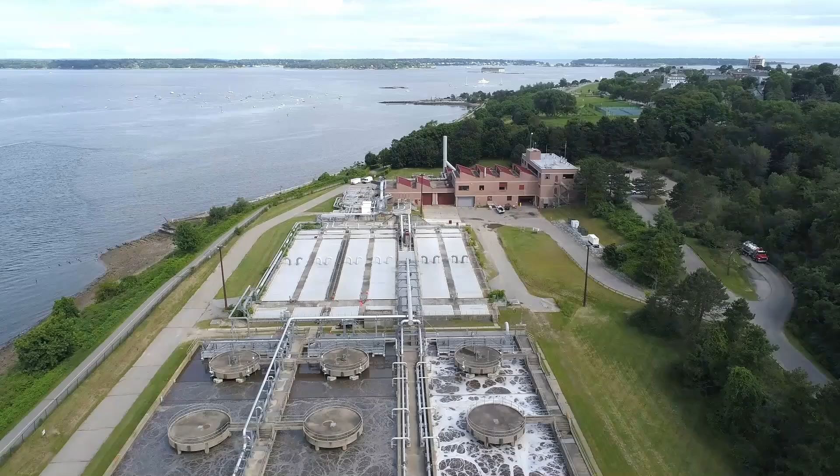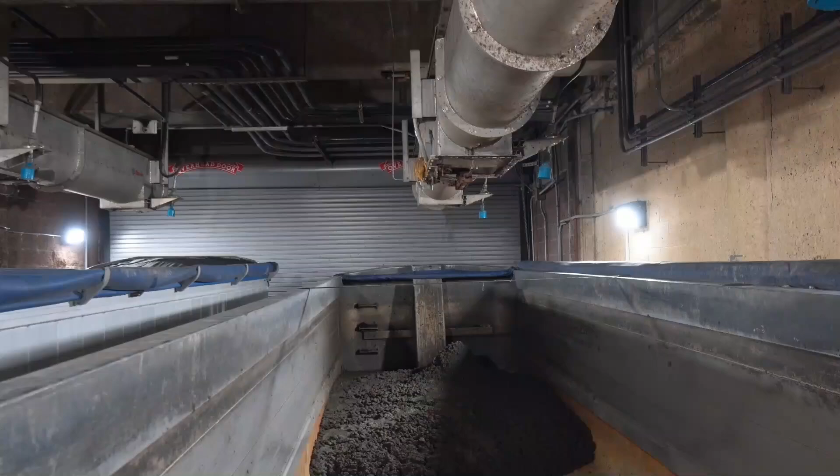The Portland Water District operates 5 wastewater treatment facilities in Greater Portland and oversees 2 of the largest industrial pre-treatment programs in the state. Over decades, millions have been invested to improve treatment to protect Casco Bay. The Westbrook-Gorham Regional Wastewater Treatment Facility was built in 1978, and the East End Wastewater Treatment Facility opened a year later in 1979. Together, these plants process over 25 million gallons of wastewater a day and prevent 8.7 million pounds of pollution from entering the environment.

Wastewater from homes and businesses is collected in a series of pipes called a collection system and is pumped to the treatment facility through pump stations. You may have seen these pump stations around Greater Portland and wondered what they do. Once wastewater arrives at the treatment facilities, cleaning begins with screens that remove debris like sticks and trash. The wastewater then flows through grit chambers that separate and remove inorganic material such as sand and stones from the wastewater.

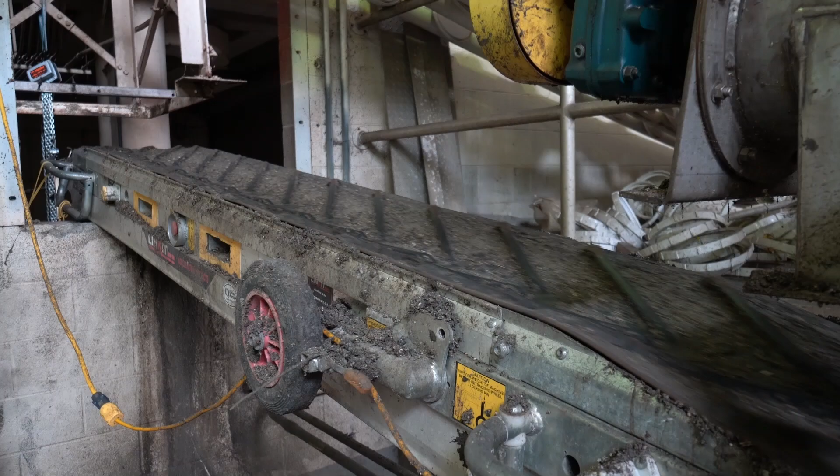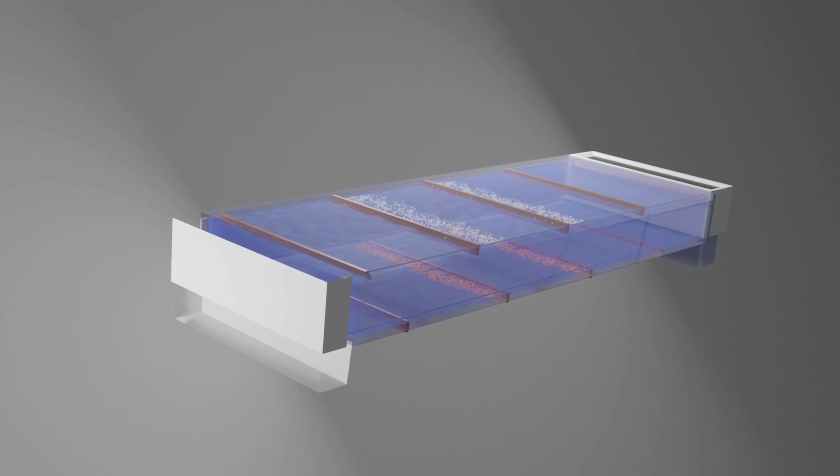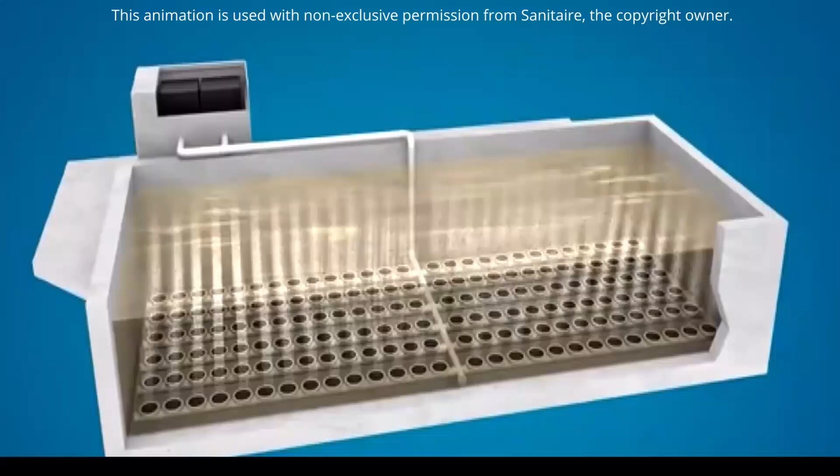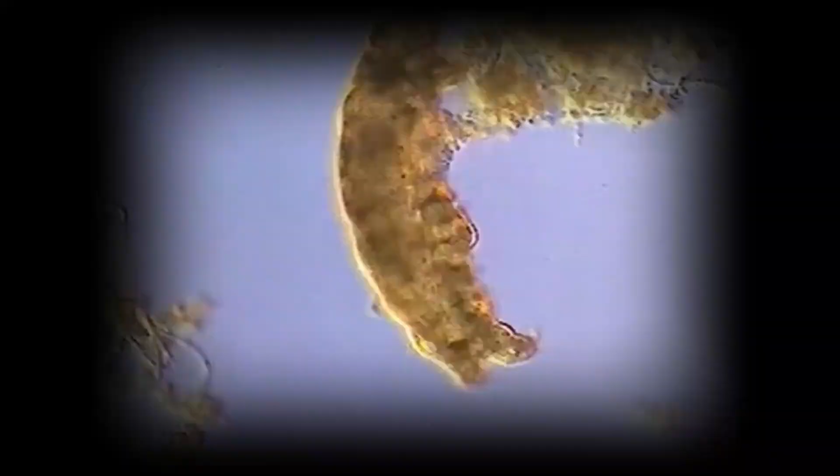The partially treated wastewater then moves to the primary sedimentation basins, which slows the flow to a rate that allows heavy solids to settle to the bottom of the tank and grease and oil to rise to the surface. Both are removed. Next, the partially treated wastewater moves to the aeration tanks, where air is bubbled in to provide mixing and oxygen to feed naturally occurring and helpful microorganisms. In an oxygen-rich environment, the microorganisms multiply and consume organic material. The microorganisms digest the pollution in the wastewater. After aeration, more than 90% of organic material has been removed from the wastewater.

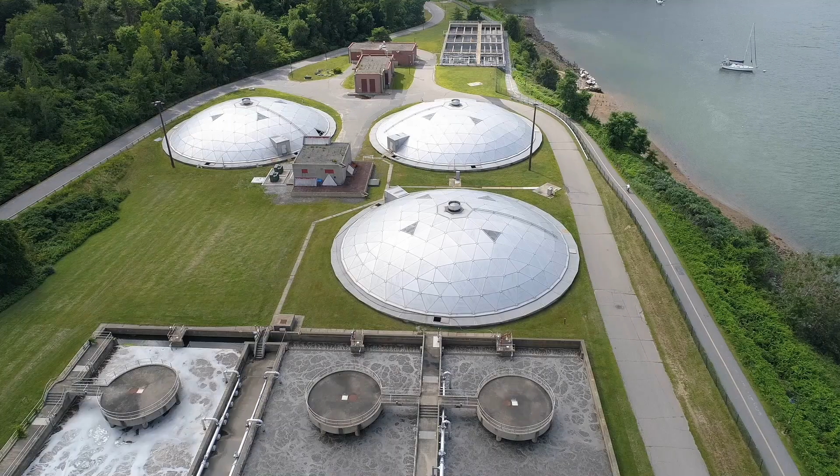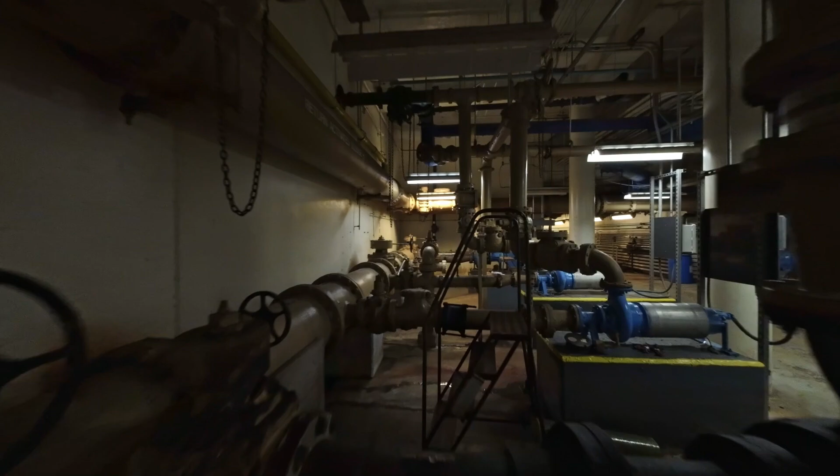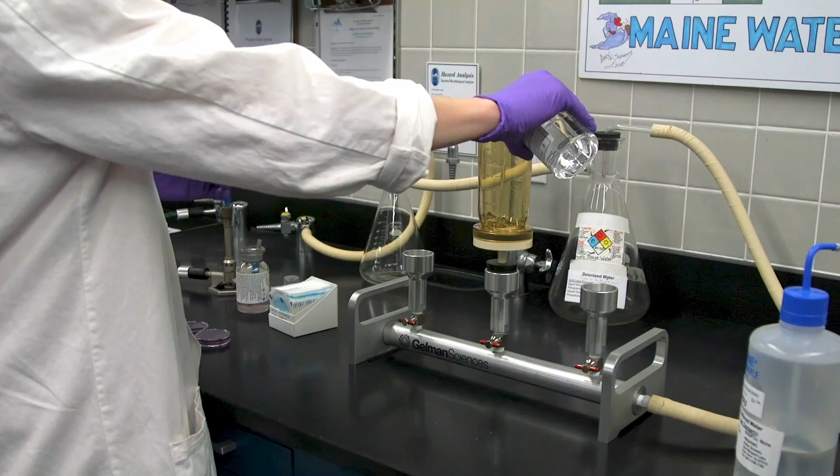Secondary clarification happens under these domes, where microorganisms are separated from the treated water. A portion of the settled microorganisms are pumped back to aeration to continue treatment. The last step in the process is disinfection. Chlorine is added to kill any remaining microorganisms that may have been present in the water. Excess chlorine is then removed, and the fully treated water is safely released into the environment. Throughout treatment, operators and environmental scientists constantly monitor processes and sample the wastewater to ensure that our goals to protect the environment and Casco Bay are achieved.